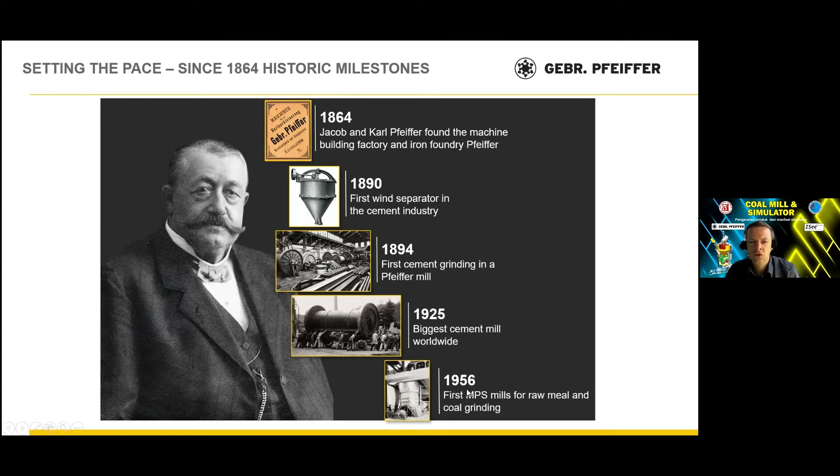In the 1950s, we introduced our vertical mill series on the market for raw and coal grinding. In 1979, the first mill for cement grinding was introduced. And today, we have the largest vertical mills in operation you can find on the planet.

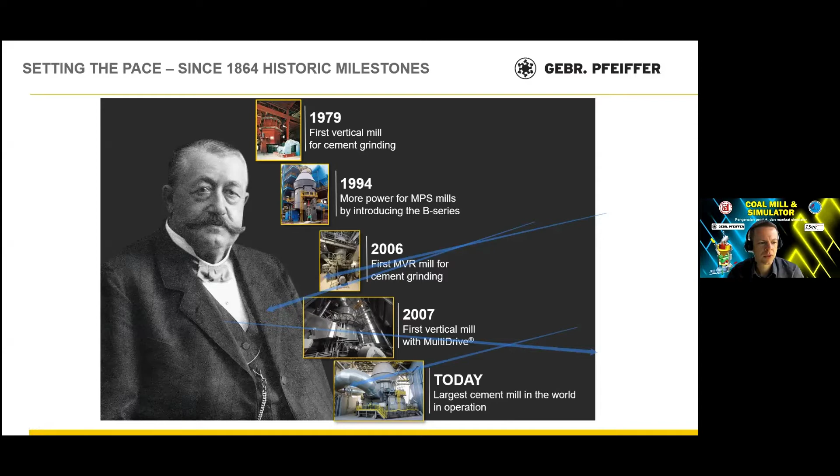Our company is located in Kaiserslautern in Germany, about 1 hour drive from Frankfurt. We have very old parts—the oldest is our foundry, located here, in operation for more than 100 years and still running.

This is unique among all the vertical mill suppliers in Germany. We are the only company with a small foundry to prepare special equipment and special liners for our mills, giving you very short delivery times for spare parts.

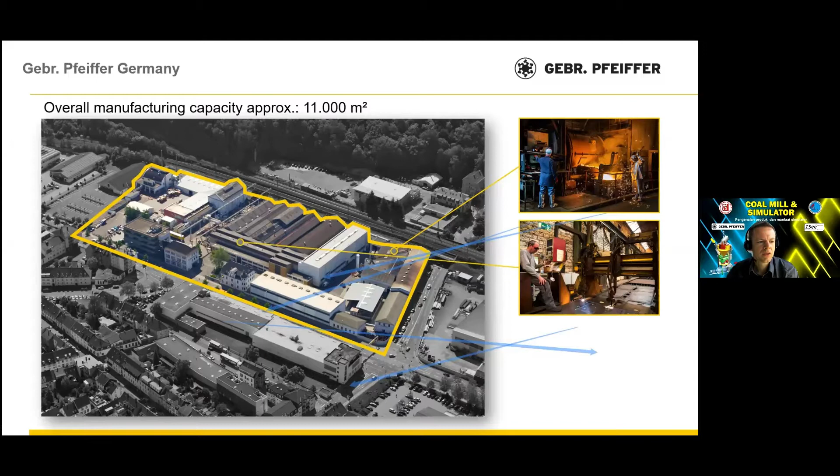We also have our own fabrication workshop for all steel fabrication and welding, and a machinery workshop for all our key components at our headquarters. So every part where we have the experience, like the grinding rollers, hydraulics, everything, is manufactured in our company.

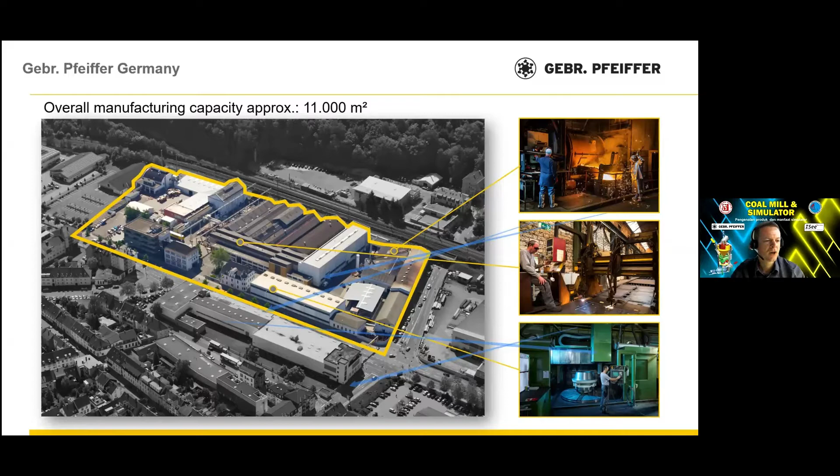Let's talk about the design. I guess all of you know modern vertical mills—at least every company doing vertical mills has one or two different types of mills. Our MPS design is shown here.

We use this for coal mills, gypsum calcining mills, and special applications. This mill has been successful on the market since the 1950s, and we have sold more than 2,200 units. What is unique is that this mill has only 3 grinding rollers.

These are stationary, and you have a triangular pressure frame connected to the hydraulic system. This gives you an equal load distribution on the table at all times, meaning the lifetime of the roller bearings and the gearbox is longer than with a big mill that has single roller adjustments.

We have the latest generation of classifier on top, to give you every kind of product you need in terms of fineness. We can use this classifier for high Blaine fineness in cement grinding, and also for the coarser fineness needed for raw material and coal grinding.

The material is fed through the chute at the center of the table, and by gravity, distributed under the rollers. With the airstream, connected here to the hot gas duct, it is transported to the classifier, where it is separated, and the fine product leaves to the baghouse.

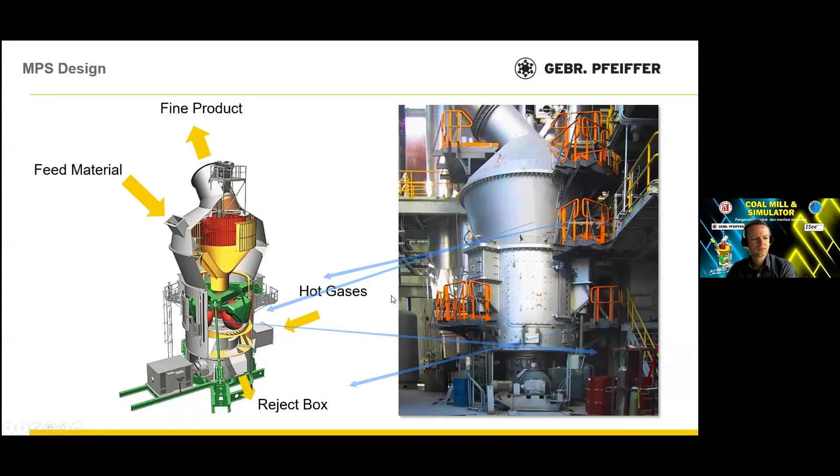Some highlights of the design we have: because of the cylindrical housing, it's pressure shock proof up to 3.5 bar, and for special operations up to 8 bar.

We have a very low false air intake because of this only one maintenance door. Other suppliers have 3 or 4 rollers, which means they have 3 or 4 big maintenance doors for each roller, and this gives you by nature a higher false air intake. False air in coal grinding is something you want to eliminate.

By this, we can guarantee a very low O2 level. O2 creates explosion risk and is also not something you want to have with coal, especially in Indonesia with the high volatile coal. It's not good to have high O2 concentrations. Because of the cylindrical design and this one maintenance door, we have a very high explosion safety and pressure shock proof design.

Another special thing, not so common in Indonesia but in some parts of the world, in one mill there will be different kinds of coals and pet cokes grinded. So in terms of pet coke, most customers or suppliers need a VSD drive. In our MPS design, we don't need that. We always have a squirrel cage or slip ring motor with fixed speed.

We have the feed to the center chute. We have a very low vibration level, and our tension device, the 3 pull rods with the hydraulic system, are all located outside of the mill, so no hydraulics are inside in the airstream with the product.

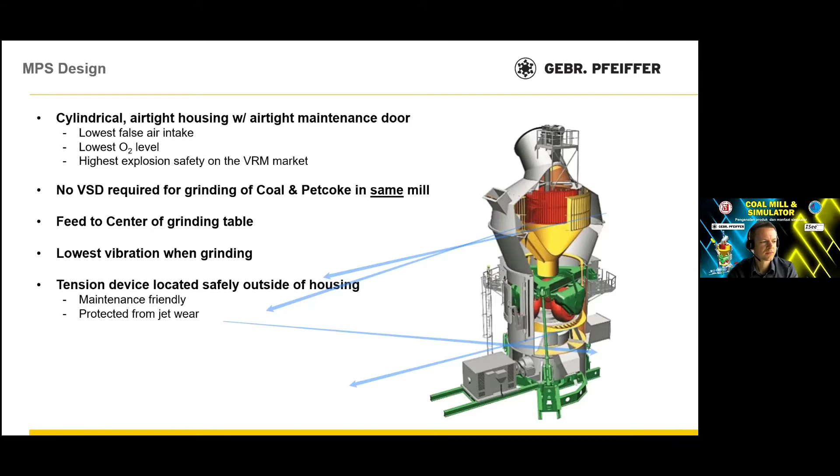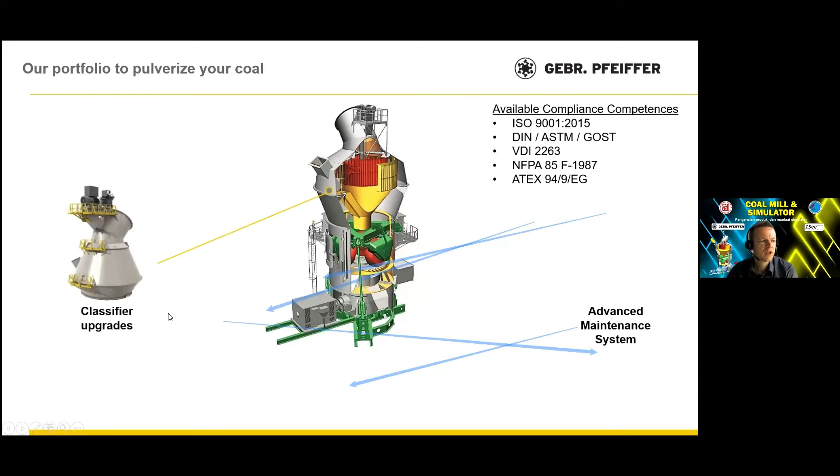Our portfolio: we have our vertical mill, which can be designed according to all standards you know in the world, NFPA, ATEX, DIN and ISO standards. And we can also do classifier upgrades on existing mills, which we have also done in the past.

And we have the GP Pro Advanced Maintenance System, I can give you some details later on. This is our answer to Industry 4.0. This means we have intelligent sensors, not only in the process, but also in bearings and in the oil to measure oil contamination and bearing condition.

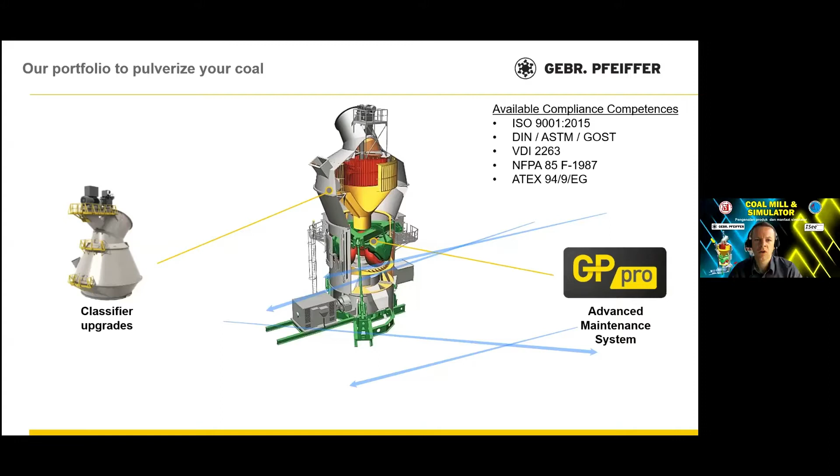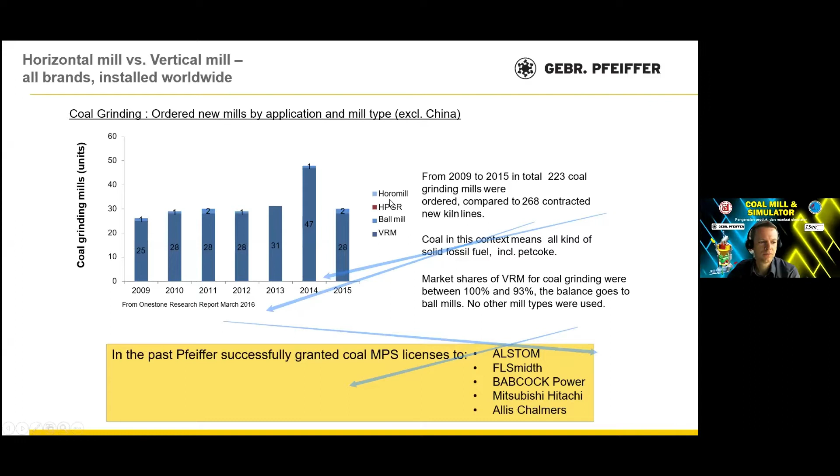223 coal mills have been ordered, and 268 kiln lines in the same time have been ordered, so most of them still have coal-firing kilns. And the market share for vertical mills is more than 93% compared to all other equipment like ball mills, roller press or the Horomill. So you can see the vertical mill is still the #1 equipment for coal grinding.

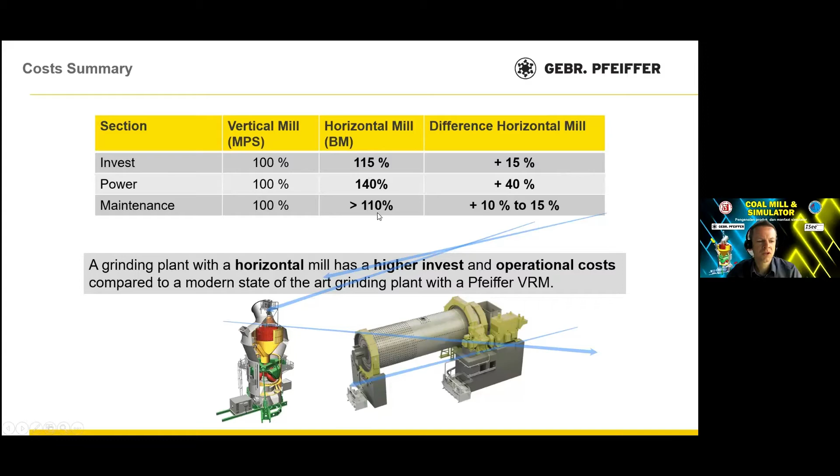Short comparison between a vertical mill and a horizontal mill in terms of power and cost savings. When we take the vertical mill as benchmark, the ball mill has a higher investment because we need more equipment, more steel structure, more civil structure. In terms of power, if vertical mill is 100%, even the ball mill has a higher power consumption because we have to turn all the balls, even if there's no material inside the mill. And also the maintenance costs are higher for the ball mill compared to the vertical mill.

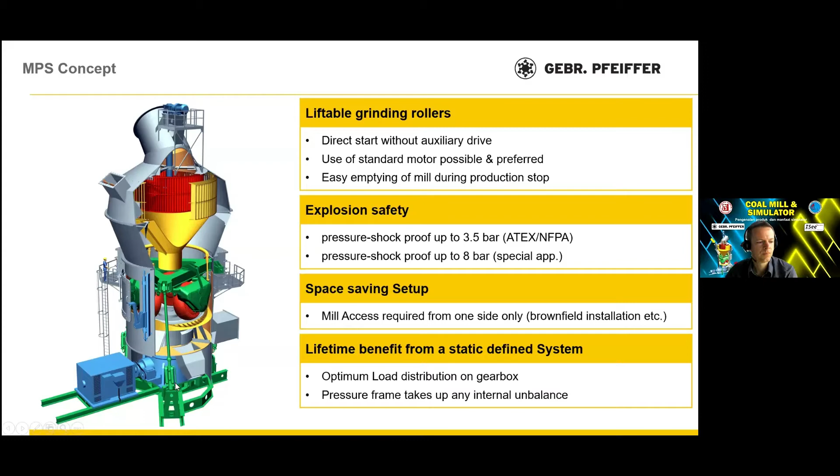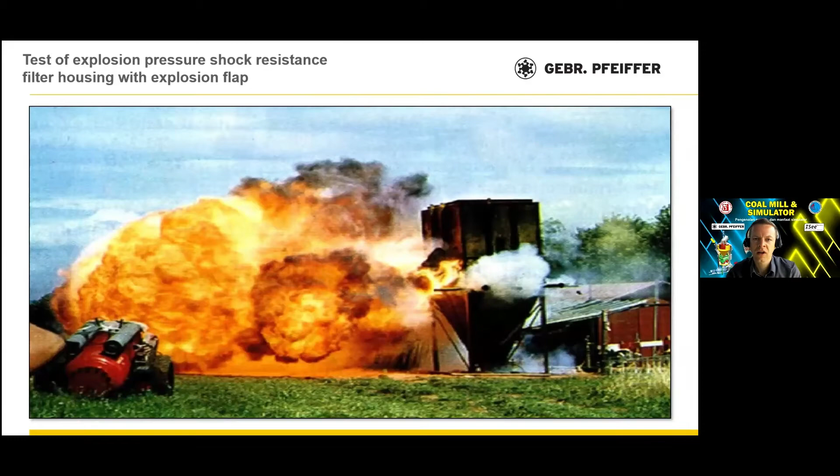This picture shows something we all want to avoid: an explosion of a baghouse or a duct. In order to provide this explosion safety, all Pfeiffer mills are equipped with special equipment. And if Pfeiffer is supplying a grinding plant, including the ductings, the baghouse, and the fan, there's also additional equipment which we will supply to assure your safety.

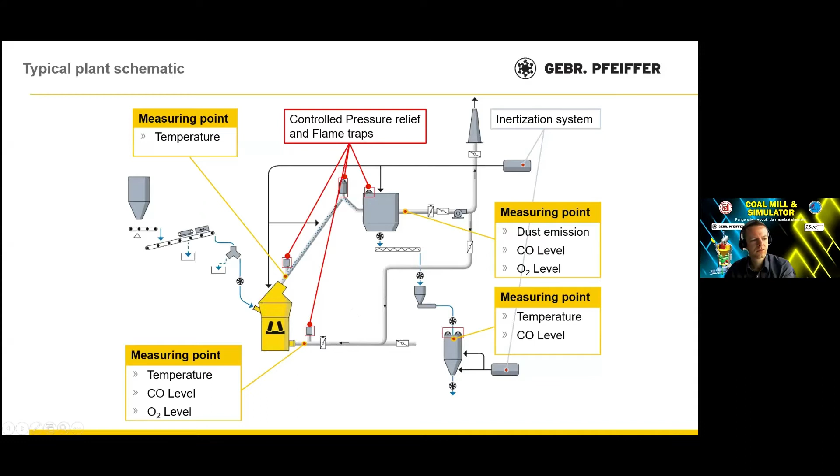So this is how a standard arrangement would look like. We have our feed bin with the belt conveyors and the weighbelt feeders with metal extraction. It will be fed to the mill, you can see it here. We go to the center of the mill.

And our baghouse here, it's a bigger one, so we have 2 explosion dampers or flaps in front of the baghouse. We have our fan, the hot gas supply ducting, and all the other equipment you need for the grinding. And this is just one example of installation.

If you have an installation like this, you will need a pneumatic transport to the finished product silo. We can also put the bag filter higher, to place the product silo directly under the rotary valve, so you will have a feed of the bin by gravity and do not need a pneumatic transport. But by this, all ductings will be longer, so the power requirement of the fan will be higher. So it's just about your requirements, what would be the best general arrangement for your needs.

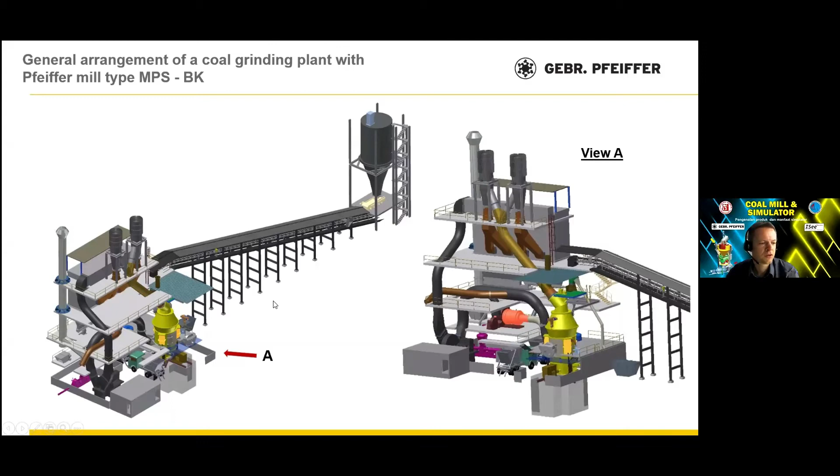Different types are possible, of course. Here I want to show you some special arrangements. In this plant, it was a small coal mill with 1.6 meter table diameter in Dunadrava, and this was equipped with a track chain conveyor in front - so no belt conveyor, but a track chain conveyor and a double feeding screw, which is also possible.

But nowadays we take rotary valves most of the time. The track chain conveyor also needs some kind of explosion valve, and this is let outside of the mill building, so if there's an explosion, all the flames will go out of the building.

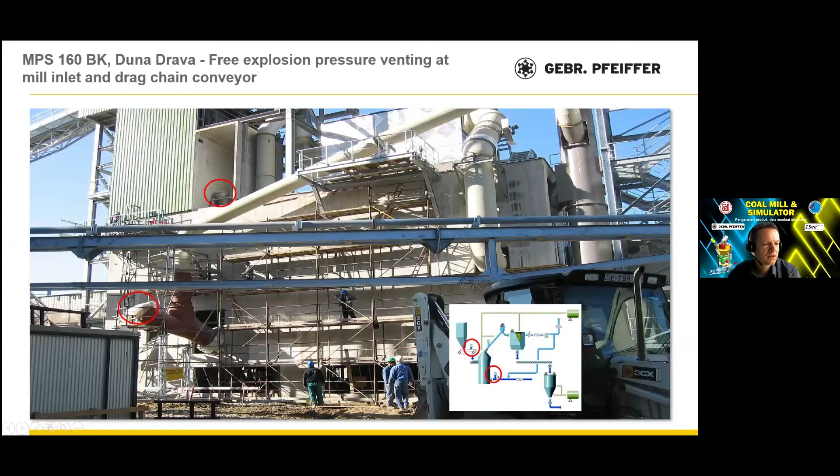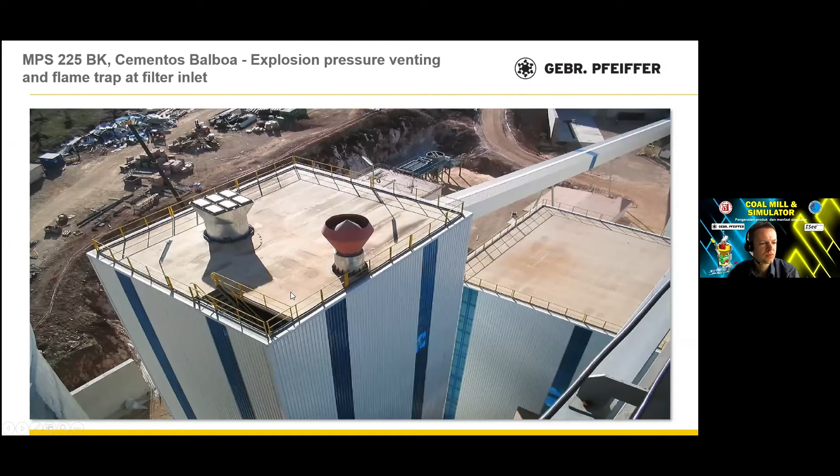This picture shows you the self-closing dampers on the baghouse. It's a small one. For this, you always need to assure that there's no building opposite these dampers.

We have one client, they bought only our mill and installed everything on their own, also the baghouse, and they placed this baghouse next to an office building. And one day there was an explosion of the baghouse and the office building was nearly destroyed. So there are also a lot of safety measures you have to consider. It's always good to have a GA, a general layout, if you make all the plans, to assure that nobody is harmed and there's no office facility opposite these dampers.

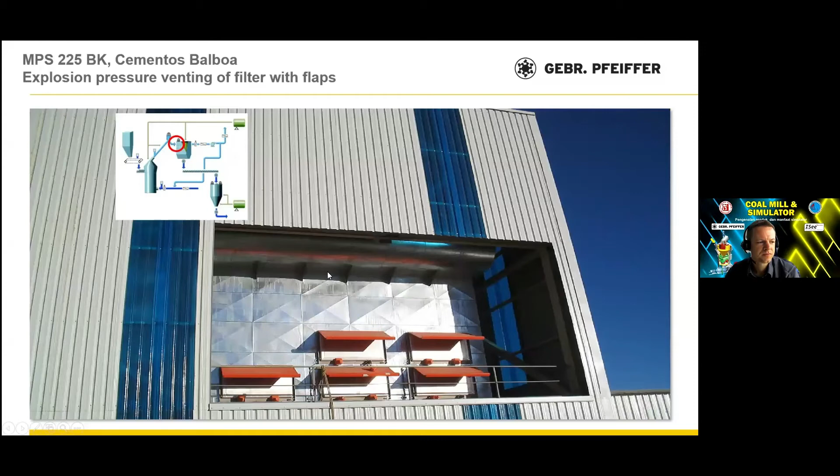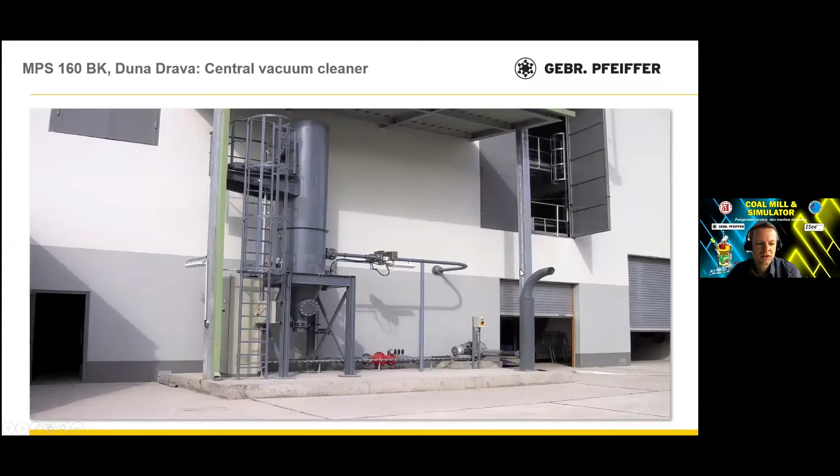Most of the clients do hard facing of these rollers. If you have a big mill, you can do this inside the mill. So there's no need to take the rollers out. If there's a small mill where there's not that much space inside for the people to work, it's better to take the rollers out.

Then we have symmetric wear parts, meaning if you have an uneven wear distribution, like more on the outside, less on the inside, you can also turn the roller tires. This gives you maybe 10, 15, 20% more lifetime of the rollers, depending on your coal. In terms of the Indonesian coal, with lignite, it's a very soft coal. There's not that much wear. So I guess for Indonesia, it doesn't make much sense to turn these parts. But if you have a hard coal or anthracite coal, like in other countries, then it makes sense to turn them.

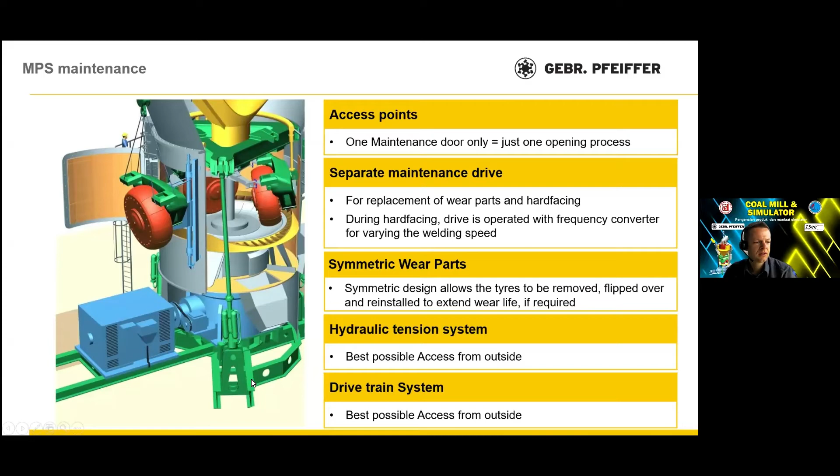The hydraulic tension system is totally located outside, so no parts inside. It's easy to maintain and to keep it free from dust. And the drivetrain also, you see the motor is located under the door. It's easy to take it away if you need it with the slide rails, and it's a standard planetary gearbox, which is common all over the world. There are many manufacturers. If we supply a mill, we still take the European manufacturers, because the price difference is not that much compared to Chinese, but they are more proven, more reliable, and the service is also better. This is our experience so far.

Short summary, not at the end, but in the middle of the presentation. With this MPS mill, we have a consistent force introduction, which means the grinding force goes from the hydraulic system to the pressure frame, the rollers, into the grinding bed and the table, and then the forces go through the housing of the gearbox to the foundation. So every grinding part in the force circuit is under control, and the complete mill housing is not connected to the grinding forces. This gives you a very low vibration level and a very low noise level.

It's very robust and efficient, so the cylindrical housing is very strong, stable. We have this pressure shock proof design with only one maintenance door. It's gearbox friendly, which means even for startup, we can lift up the rollers, and also for the erection job, when the gearbox comes later, we can already install the mill completely by placing a dummy under the mill, and put the gearbox under the mill later on.

It's a very compact design, because you see this is our foundation part. It's very small, compact design. We have 3 connections for each hydraulic cylinder and pull rod, and we have the slide rails for the mill motor. That's all we have on the foundation. It's a very compact design, and we have very high throughput levels and power density in this mill, meaning with a comparatively small mill, we can have a high output.

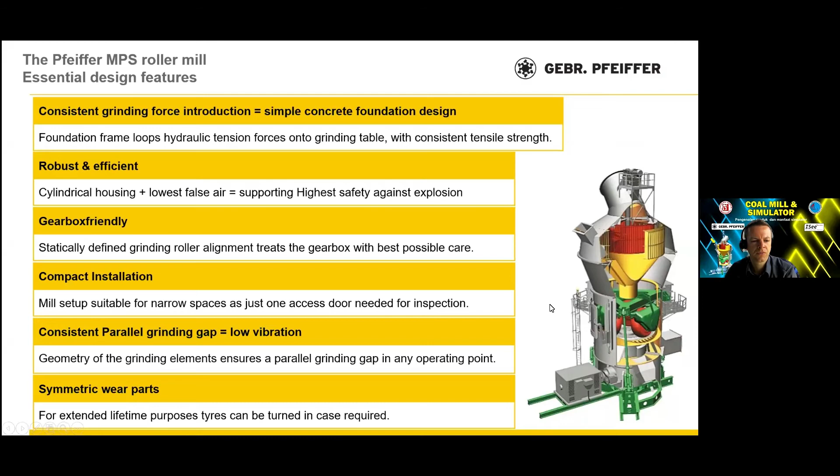Gebr Pfeiffer has many references in the world, and by this we also need a lot of offices to be near to our customers. So just in the past years, we have opened a new office in KL, Kuala Lumpur, which is dealing with the Southeast Asia region. We have also some spare parts warehouses in the Philippines. We have a big office in India, which was our first daughter company. This is our Kaiserslautern office, where I am located. And we have a second big office in the US, dealing with the whole North American continent.

Then 3 years ago, we opened one in Brazil, one in Egypt, and also a daughter company in Russia, with many local partners in Africa and other parts of the world. So this enables us to give you always a good and fast support. So for example, in KL, Kuala Lumpur, we have process engineers, and we have supervisors. They can help you with spare parts, with supervision services, and they can travel to any place in Indonesia within a few hours.

Something new with the Industry 4.0 I showed at the beginning is our GP Pro system, advanced maintenance. By this, we have also the possibility to collect your data of the operation and can give you remote support whenever you need it with all our expertise in Kaiserslautern. So whenever you have a problem, you can grant us access to your data of the mill. We can then check the data and give you advice, for example, how to optimize your operation, how to have more throughput, and all these things. And we can give you also recommendations about the process to check if any other part of the system, like the fan, needs to be optimized, even if we have not supplied it.

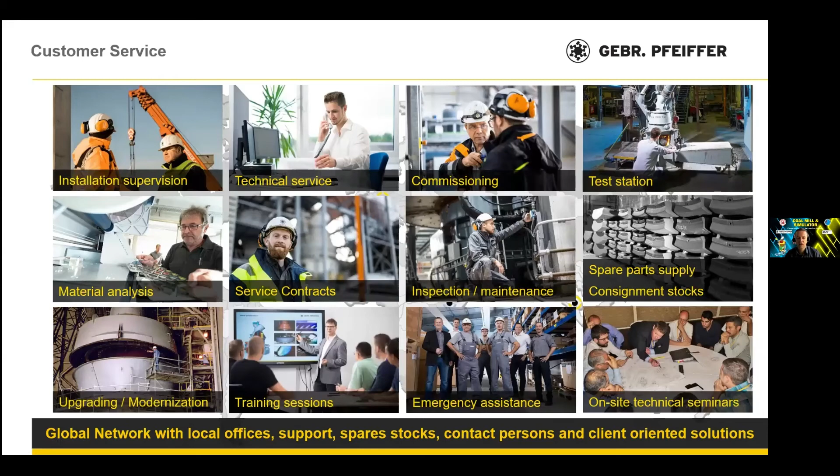We can give you training sessions. We can give them on site in an existing plant of some other customers. We can also do online training. And nowadays, if we supply an automation system, we can also give you operator training on the automation system in advance on a virtual basis. Then we have also emergency assistance. Our assistance is available almost 24 hours a day.

And what we have done in the past very successfully is on-site technical seminars or regional seminars. Maybe some of you already attended our seminars in Jakarta, Kuala Lumpur, or Manila in the last years. And these are just some things of our customer service which we offer.

Let's come to some references. So Gebr. Pfeiffer has sold more than 180 coal mills for cement plants worldwide, throughput rates from 8 to 110 tons per hour. So you see this is a wide range which we can offer. And all installations have from 100 kW to 1.3 megawatt installed power.

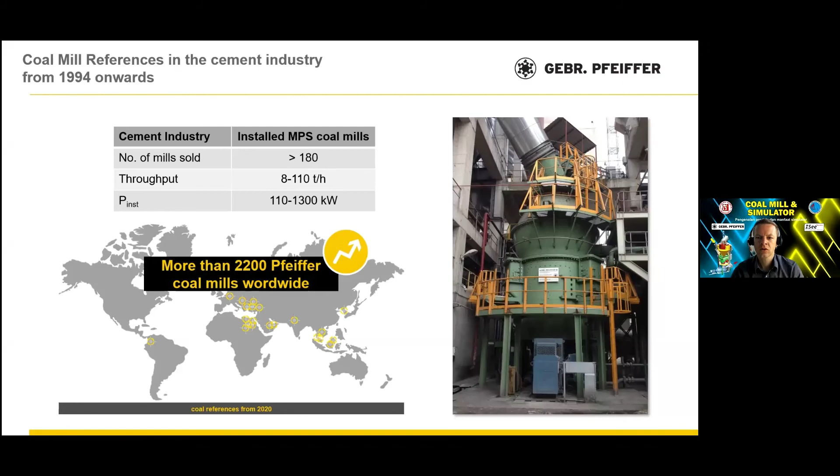And these are the references from 1994 onwards. So all MPS mills before 1994 are not considered here. So this is our latest MPS type Series BK, which is also working in Indonesia. And in total, more than 2,200 coal mills have been sold worldwide by Pfeiffer for cement, for coal, power, and for the steel industry. So now coming to Indonesia, we have 3 very good references here.

The first one is Semen Merah Putih in the Bayah plant located here. It's the biggest coal mill so far sold worldwide. It was sold for 100 tons per hour, and some people from Semen Indo are also listening. I guess it was running at 115 tons at some times, where we have the data available, and it's still the biggest coal mill in the world. Also from the capacity which it can bring, it's still the biggest.

The second one is located in Sulawesi in the Semen Bosowa plant of Maros. The first one has a 4.5 meter table, for example, and this one has 3.75 meters. It's 4 sizes smaller, and it's about 60 tons per hour throughput. And the newest one will be operated in the Grobogan plant, which is located here. The plant is currently under erection; because of the pandemic, everything is a little postponed, but I hope that everything will be ready beginning of next year.

Further to the 3 coal mills in the cement plants, there's also one in an old plant which was supplied by FLS in the past. So FLS was our licensee, which means in the past FLS did not have their own vertical mills. Every vertical mill sold from FLS before 1995, 98, I guess, was a Pfeiffer mill. So whenever you have an old FLS plant, you will find our MPS mills also, maybe with an FLS brand on it. And also in power plants, we have more than 40 mills sold, most of them in the Surabaya area. And these are mills from the size MPS 2250, which was a mill for the power plant industry.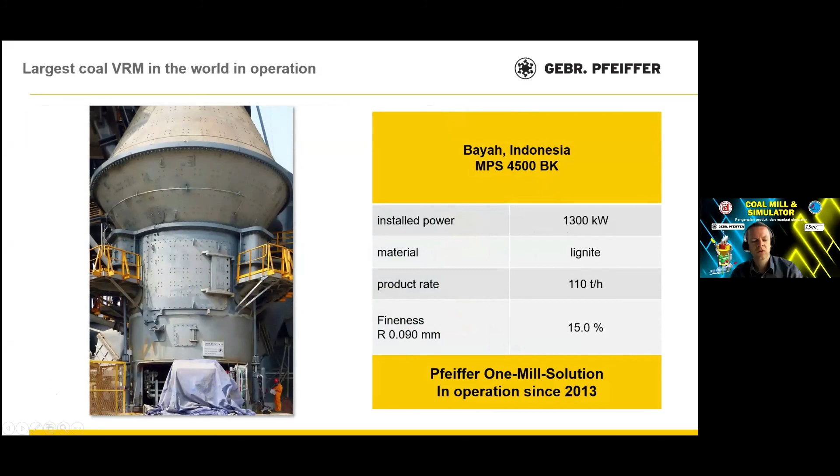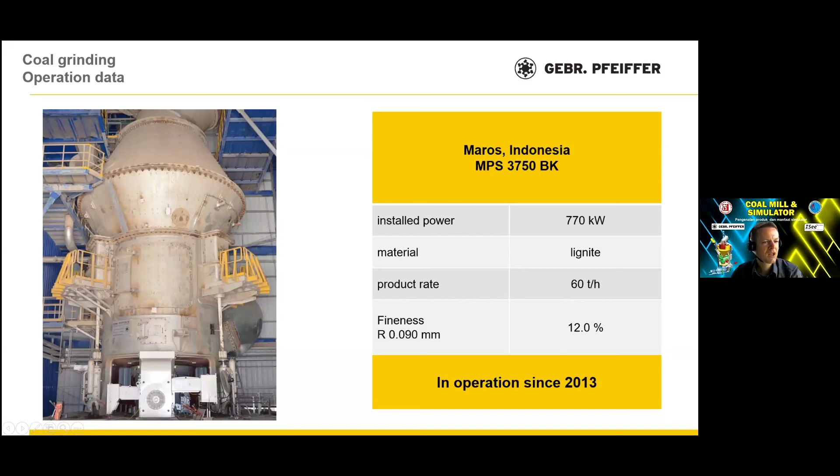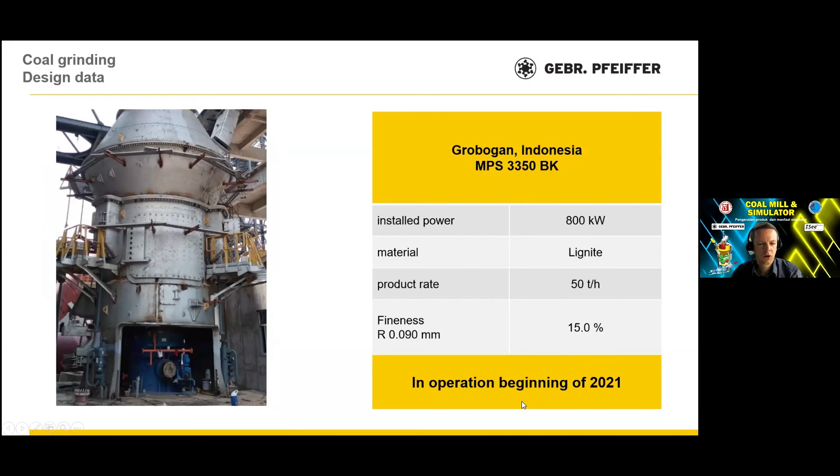The second one in Maros, the second biggest one we have supplied, has 770 kilowatt. It's also doing the same coal, 60 tons per hour, a little finer material, and also the same moisture. And this is in operation since 2013. The latest one will be in the Grobogan installation, 3.35 meter table, 800 kW, also lignite, 50 tons per hour, and hopefully beginning of next year, this mill will be in operation.

Then also in the neighborhood of Indonesia, in Cambodia, we have supplied a big plant with 3 mills, also with a coal mill, 800 kW. And this plant in Cambodia also has a 5-meter raw mill of the new MVR design, which is the most modern vertical mill on the market so far, and a multi-drive mill with 6 meters for cement grinding. And this mill has 6 motors. This is very special. This is the first mill with multi-drive in Southeast Asia.

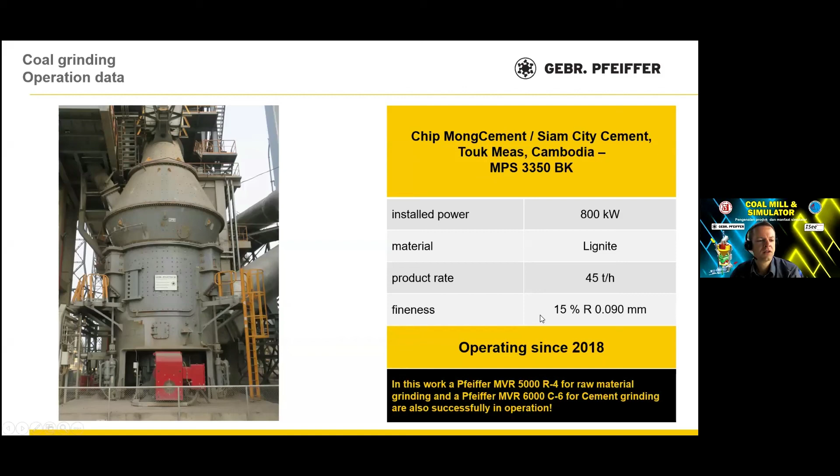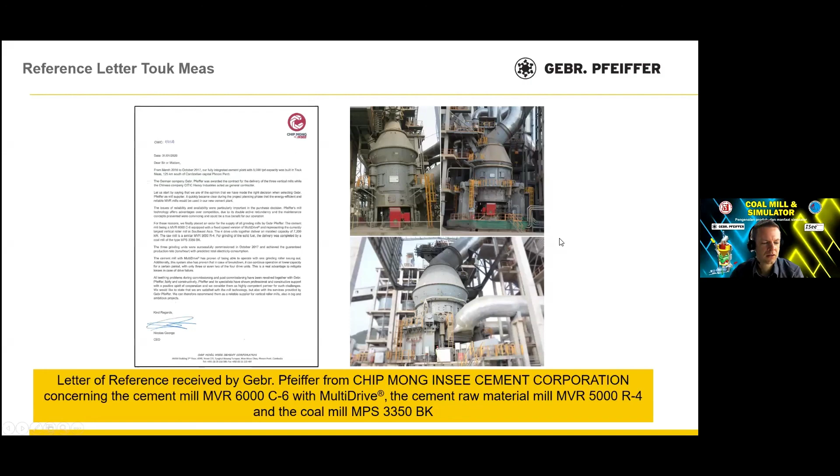This is something the client from Touk Meas granted us, a reference letter to show how confident they are with all these mills and that they run to their complete satisfaction, and everything, including service from Pfeiffer, is very good, and they are happy that we have served everything to them.

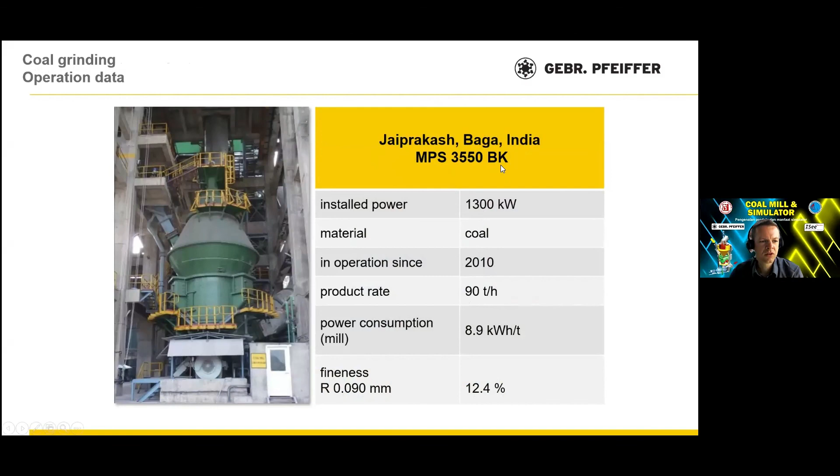Some other references, you see, this is now a mill in India, also 3.5 meter table, and this is a standard coal. This makes 90 tons per hour, and they have 1.3 megawatt, even if this mill is smaller, because this coal is harder to grind than lignite. Same in the Ukraine, same kind of mill, 1.1 megawatt, and they do a mix. They can grind coal and anthracite, and they're just changing the product by pushing one button, so no need to make changes inside the mill.